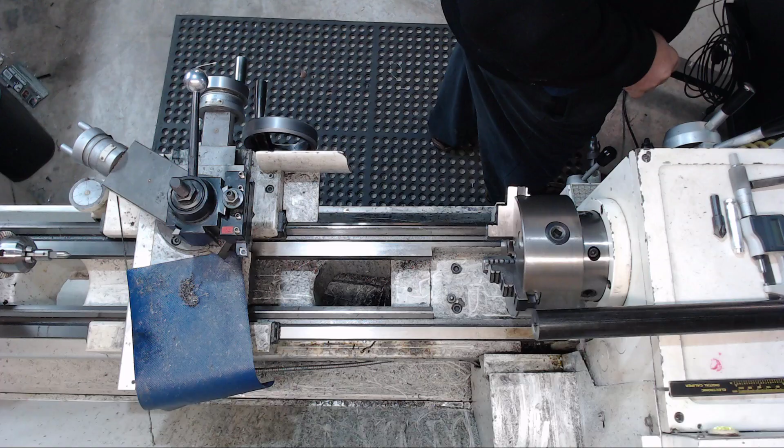rather than worrying about that for tonight, I wanted to do something on the other side of the shop. You can see my background's a little bit different, and my project view is a little bit different. So, what I want to do today is, the chairs in my kitchen aren't sliding right anymore. The little sliders on the bottom of the chairs are all scuffed up and they're not working.

And being that I am cheap and lazy, I don't want to go to the store to do it. Although I guess it's not really going to make sense because I'm using a big lathe to make something that costs $5. Doesn't matter. I can, so I'm gonna.

So what I'm gonna do is I'm actually gonna take some material and we're gonna design it in Fusion just so that I have some numbers to reference while I'm making these, because I'm gonna need to make 12 of them. Hopefully I have enough stock, but we'll make 12 of them, and then I'll see if they fit on the bottom of the chair and they make it work better. So let's go on to the design phase.

I already got some measurements from the bottom of the chair, and it looks like the slider pucks themselves need to be about between an inch and 1.125. It's a chair slider. It doesn't got to be that precise, but we're going to make it that precise because we can.

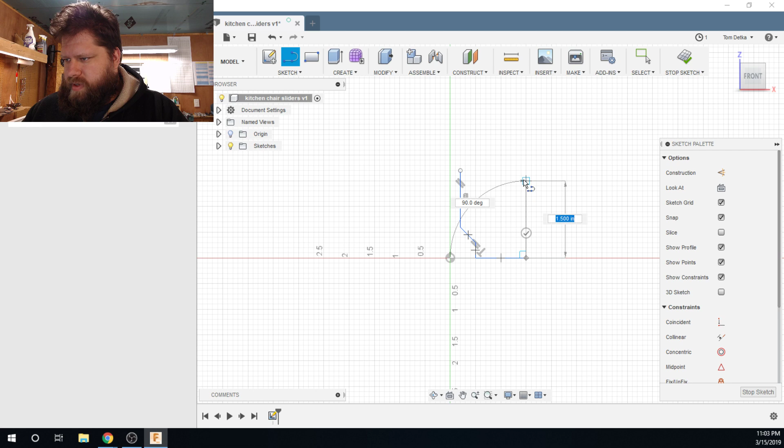I know that I want a line from here. Well, I guess I don't need a center line. Okay, so it's going to look something like this, like this, like this, like this, over here, up here, like that. That's what I'm going to make. Maybe it's this way. That's what I'm going to make. So something like that. So now we just need some dimensions.

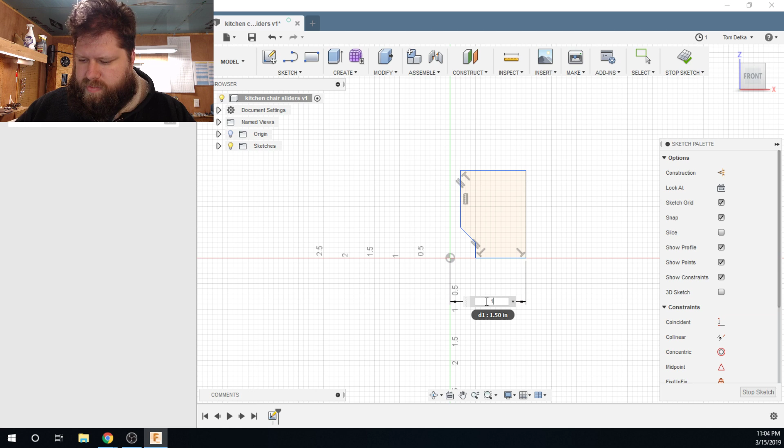So we know that this from here to here is going to be 1.25 or 1.125 divided by 2. I want the overall height of this thing to be, hey, do what I tell you. Oh, I guess I got to hit the right letter, huh? About 1 inch high.

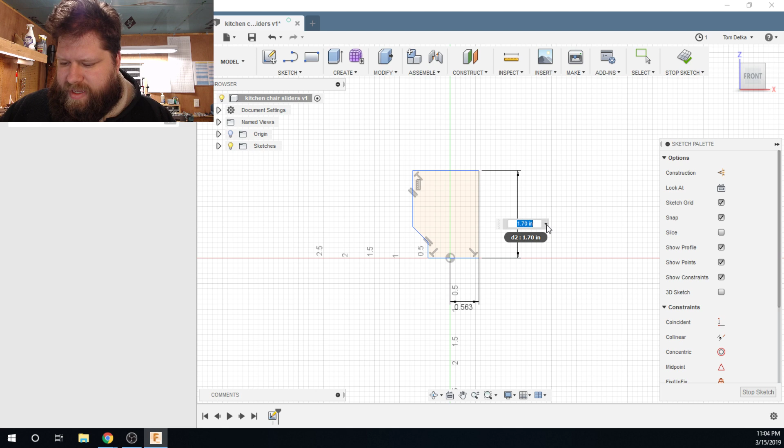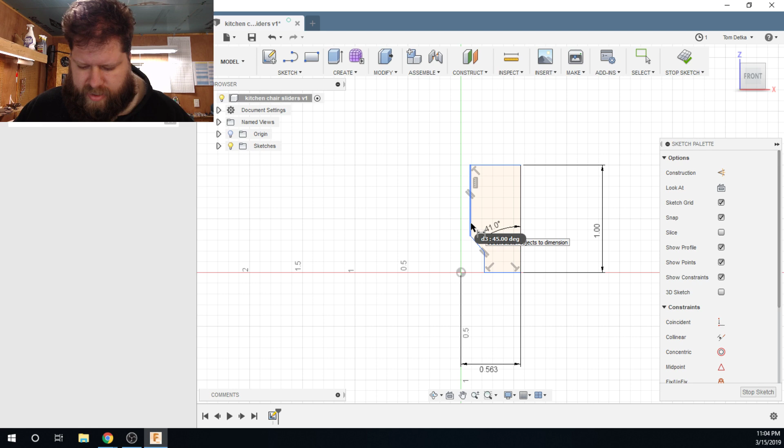And I know that this is going to be 82 degrees. So from here to here is 82 divided by 2. So 41 degrees. Okay. And I have a screw right here. I'm probably not going to use these particular screws. These are a little bit long, but I'm just going to use something similar.

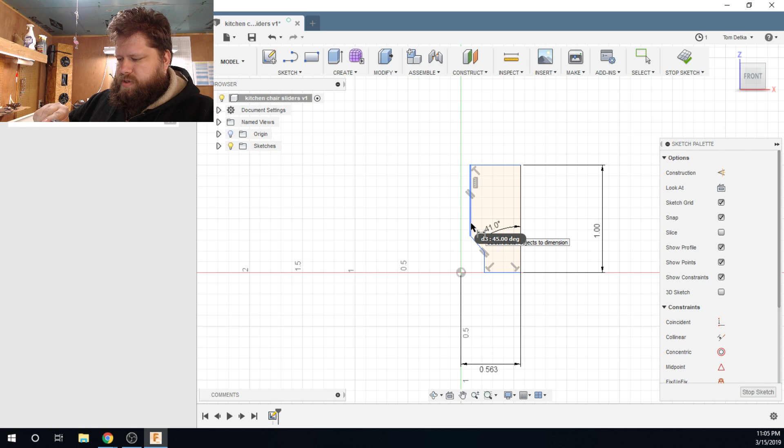So I need to know what the head diameter is, and that is measuring at, you are not going to be able to see this. I'm not going to be able to hold it up, but it's measuring .3321. So we're not gonna make it precisely .3321. We're just gonna make it close-ish. And actually, we should probably look and see if we have a 3/8 countersink.

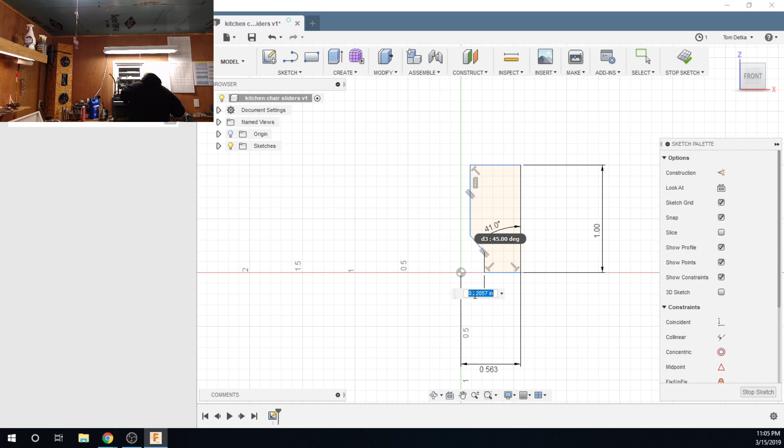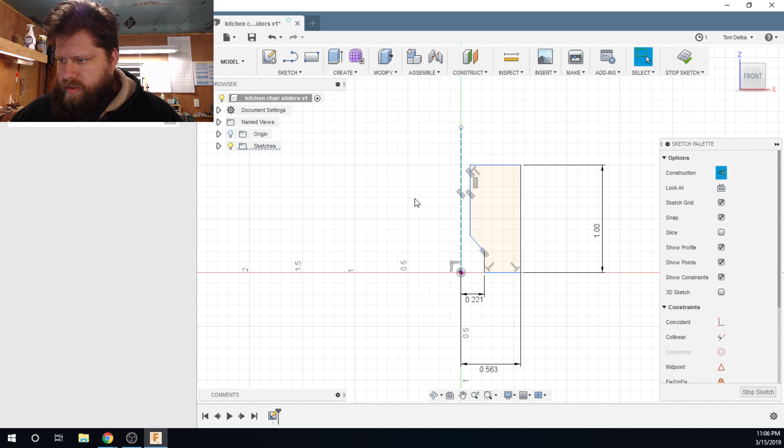Okay, I do not have a 3/8 countersink with an 82 degree inscribed angle. So what I'm going to do instead is I'm just going to drill the hole and use the 118 degree tip on the drill. So let me put a line from here to here, give this a construction, give this from here. So that's 118 divided by 2. So 59 degrees. Yeah, that's close enough.

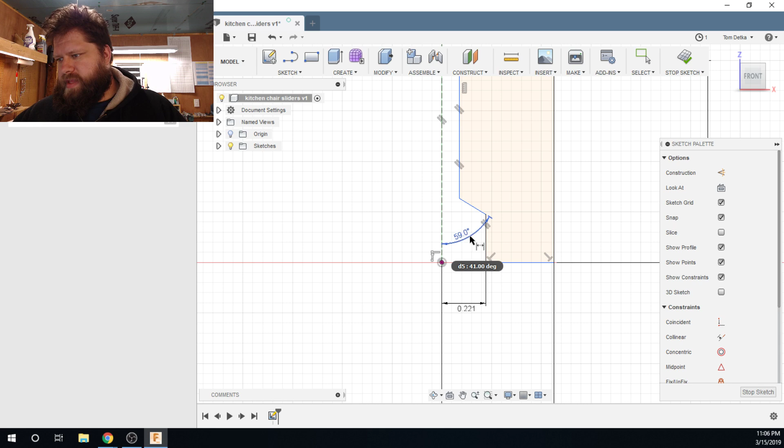The reason I'm using 118 degrees is because that is the standard angle of the tip of a drill. So that'll make life easier. So it's already the right size. So with this dimension, we're going to use a 3/8 drill. So 0.375 divided by 2.

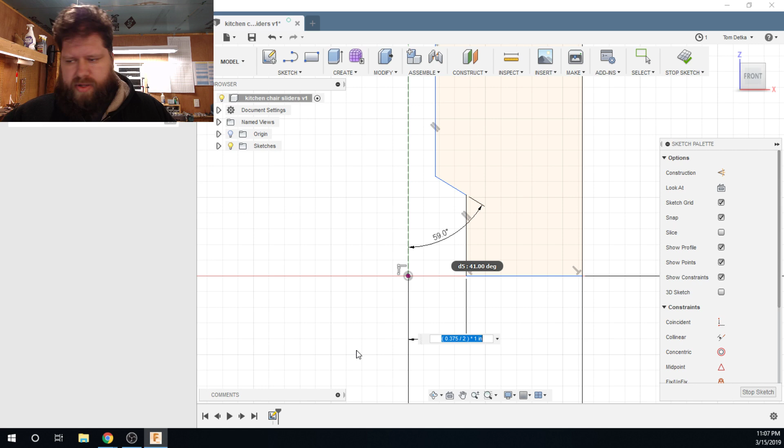Now I could just put in .1875 there, but I like to do the actual math, because then whenever I go to double click on, you can't see me pointing at the screen, but whenever I go to click on that and change it, it comes up with the original dimension that I wanted. That way I can remember that in 3 months whenever I need to make more of these or whatever. So then, to add to this, we are going to want to know how deep this thing actually needs to go.

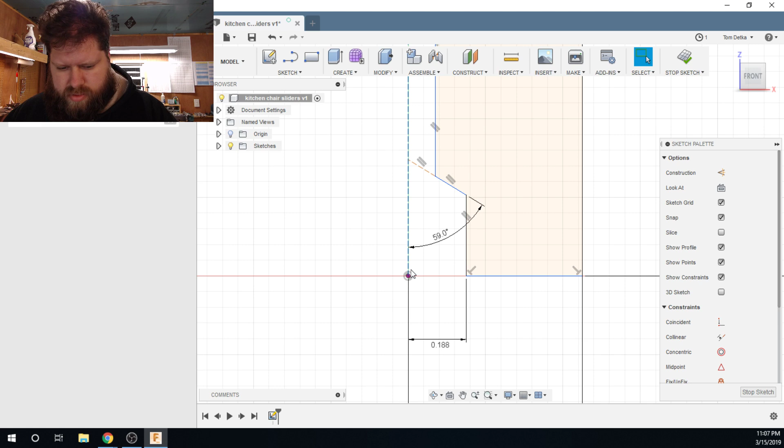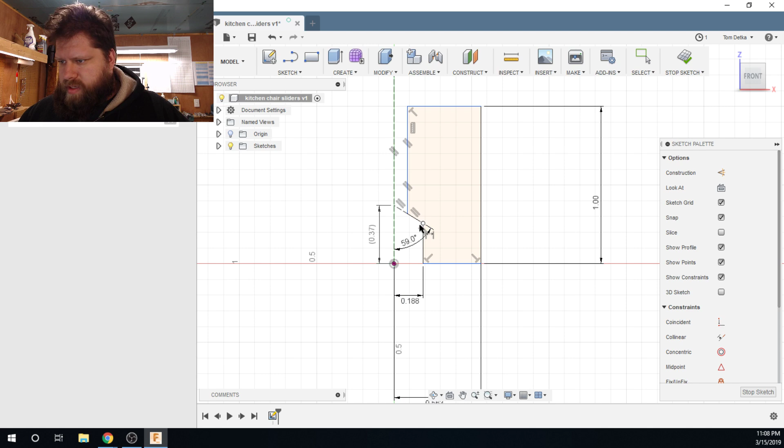So if I make this and this coincident, this is for construction. So basically I'm going to drill from the tip of the drill 0.370 deep to get that dimension, but we're actually going to go deeper than that. We're actually going to make this a driven dimension and give the dimension from here to here of 0.25. And this is coincident. So that will make my drilling 0.860 deep or thereabouts.

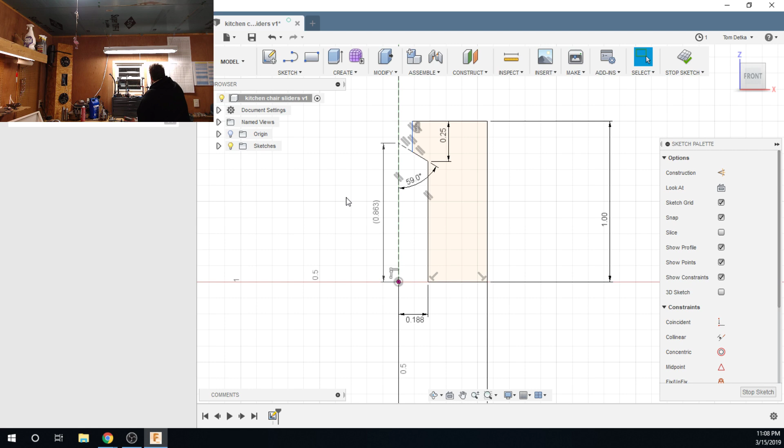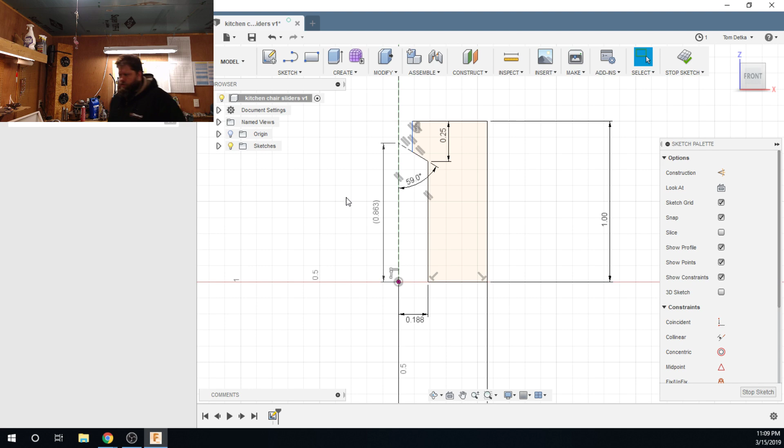And how big is the hole that needs to go through? So we're going to need to make a clearance hole. I'm getting 0.141 on the diameter of the screw, so I need to be a little bit bigger than that. So I go over to my drill chart. I'm looking for 0.141. 9/64 is 0.140. So we're looking at a number drill. Okay, I have a bunch of 0.144 drills, so that's what I'll be using. So keep that right there. From here to here, we'll do 0.144 divided by 2.

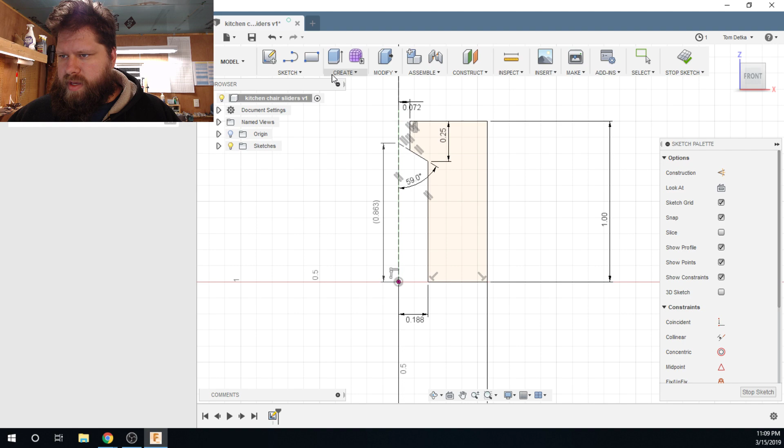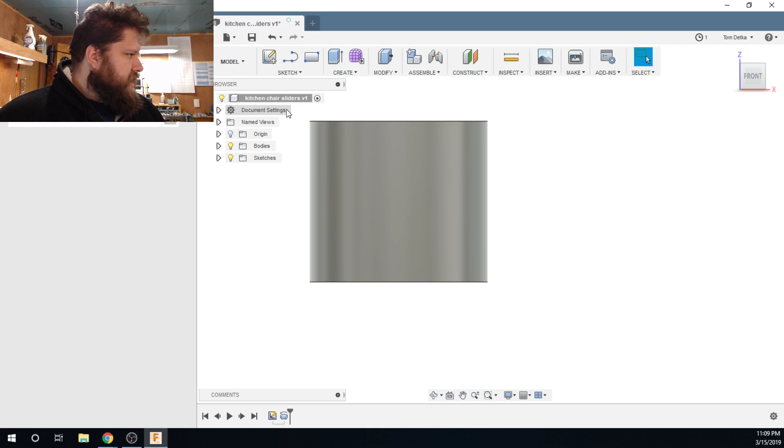And there we go. So now this would need a revolve, this around this. Okay. I do not have my radius tools here, so we'll have to put a chamfer on this, or we'll blend it by hand on the bottom corner. We'll just blend that by hand. So I'm actually just going to leave this in sketch mode for now so that I can reference back to this whenever I need to.

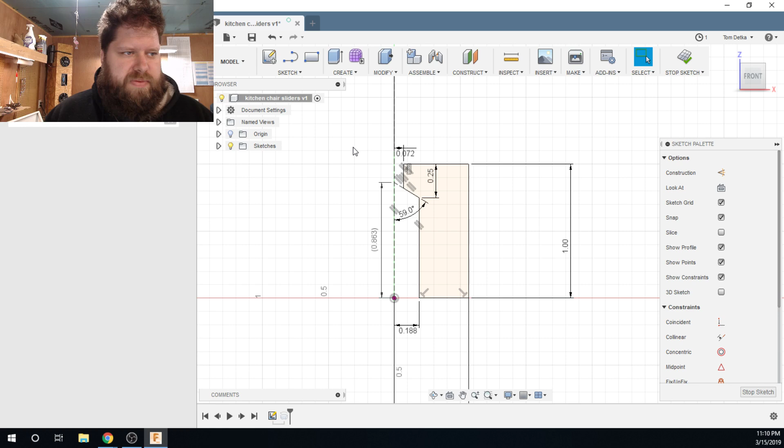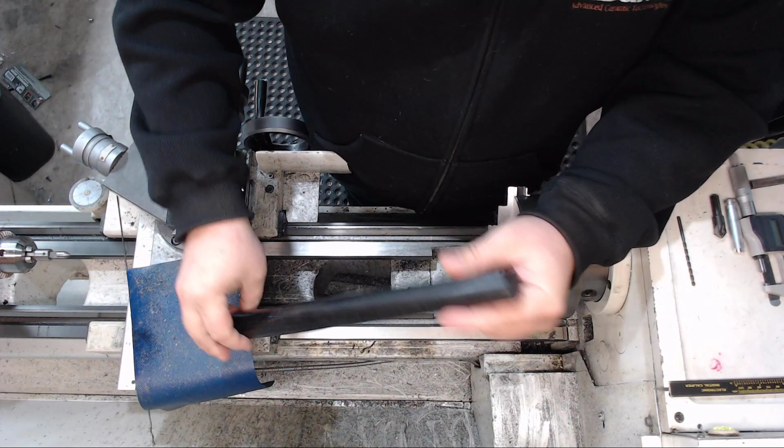But we're going to go over to the project and look at the materials. And we'll also get it so that I can still see chat again. Okay, so back to just the straight project. So this is the material that I'm going to be using. This is just black nylon. I think this is nylon 6/6. It's either 6/6 or 6/12, I'm not sure. In our case, it doesn't matter for what we're doing. There's a piece of something stuck on the side of it here, kind of embedded in the side.

So what we're going to do is first of all see how deep this hole is that we got drilled in the end of it from a previous project. We're just going to face that off, and we'll turn it back far enough to do maybe 3 or 4 of these parts. 4 of them would probably be good, so we'll need like 4 inches plus another inch plus an eighth, so 6 inches. That's going to be too much. Let's see, if we go 2 inches, 2.5, 2 3/4, so it's about 3 inches to stick out, so we'll do 2 at a time. That sounds about right.

But for right now, we're just going to see how deep we're going to need to face this thing off. So we're going to be cutting at around, yeah, 755 works. Kick it into high gear. And let's see, what kind of feed rate do we got going on here? Yeah, I got D. Okay. There we go. Getting pretty close. Okay, so that's our 0 right there.

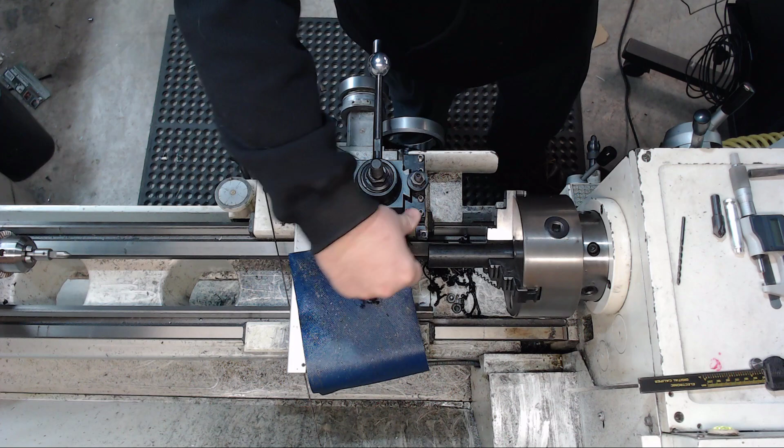So what I'm going to do here will just make my life easier. I'm going to touch off this edge and call it Z0, and then come out to -3 inches. 3, 2, 1. Close enough. Then just pull this out till it touches, and we should be good to go. And we face it over one more time. So that's it. That's our stock to size. We got our 0 set for our tool number 4, which is labeled right here. I'm not sure you'll actually be able to see that, but it's there.

So now we wanted to cut that to, what did we say? 1 1/8 inches. So I'm going to touch off and get a measurement on what diameter this thing is actually cutting right now. And I'll put that into the DRO. And once I have that into the DRO, then I can go straight to size. So let's close that. Okay.

So now we'll just get a quick measurement on the diameter we're cutting. So 1.230. And my DRO looks like it's set. 1.230. Enter. 1.229. So then I'm just going to go straight to size at 1.125. So let's see, 1.125.

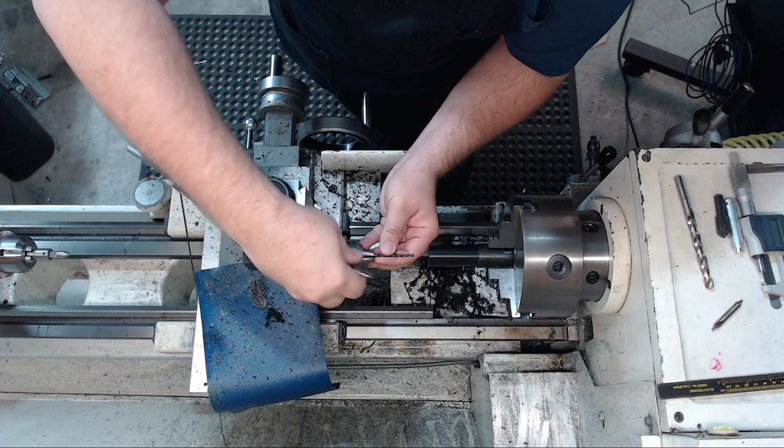Okay, that's as deep as I can get it, and that is 2 inches deep. So we actually might have to, on this, once we cut this off, when we go to the second one, I'm not sure we'll be broken through. We might need to drill a little bit extra with this smaller drill, which is fine. That'll be easy enough to do.

So now we're on to the 3/8 drill. And let me double check what was our depth. 0.863. Okay. Okay. Just double checking something. So again, we'll just eyeball this 0. And that looks about right. 0.863, right? Okay. So that's our first one, almost done.

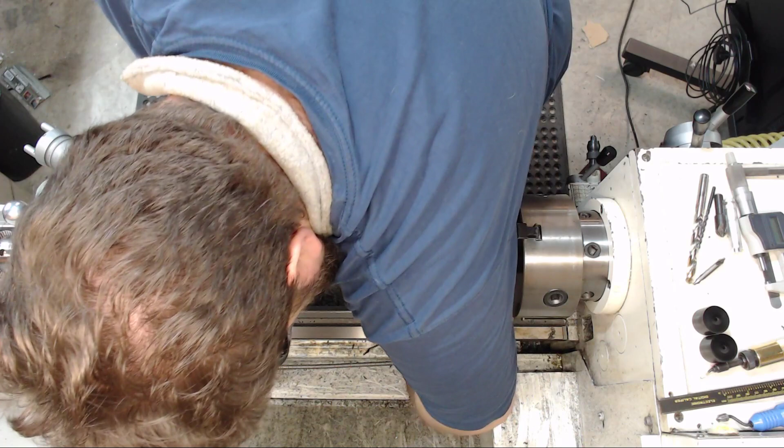So I got the 2.4 that time, which should be more than enough so that I don't have to go back and re-drill it with this small drill on the second part. That's pretty good. 863. Burr. What do I want to do now? Oh, chamfer it before you cut it off. Oops. Quick chamfer.

And 1 inch. And the burr. And just out of curiosity, it's probably a little bit too late to have this curiosity now, but that does in fact slide down in there. So that's what we wanted. We wanted to be able to put that screw all the way through and have the head get recessed like that. Now I can clean it up until I hit the bottom of the hole where the head of the bolt is.

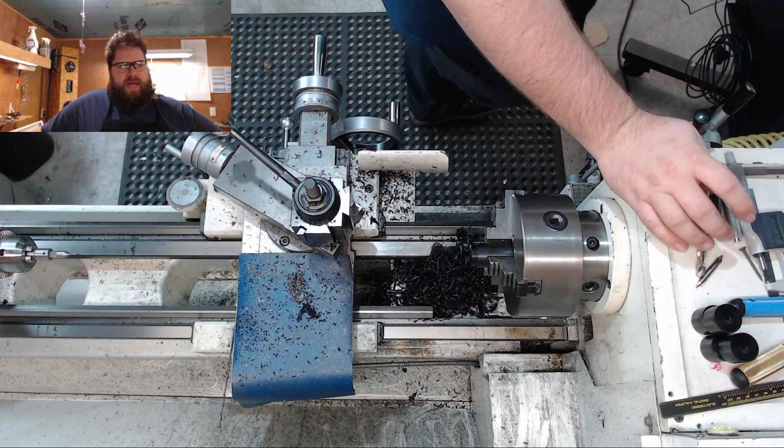So now I have 4 chair sliders in less than an hour. And a lot of that was obviously setup, but the actual machining time is pretty dang quick. Faster than a 3D printer. So yeah, you can see working on a lathe like that, it's pretty quick to do something like these guys here.

I think I want to do some more lathe videos like this. I'm working on the mill, but again, it's been a long time since I needed to do anything on the mill. Most of my work that I do is lathe work, at least here. At my day job, it's mostly mill work, but whatever. I don't think you'll get to see that unless we decide to make a video or a channel or something, and I'll bring this whole setup to work and do stuff there.

So I don't know if we had any viewers? I don't even think we have. That's okay. This is definitely not something you normally see on Twitch, or really YouTube Live. I don't think either. Maybe some of the machining guys do it, but I haven't seen any. Of course, YouTube streaming live is really difficult to try to navigate. I can't figure the damn thing out.

Okay, so that was a quick stream, but I got my chair legs. I'm going to go put those together and probably see you tomorrow sometime for something.